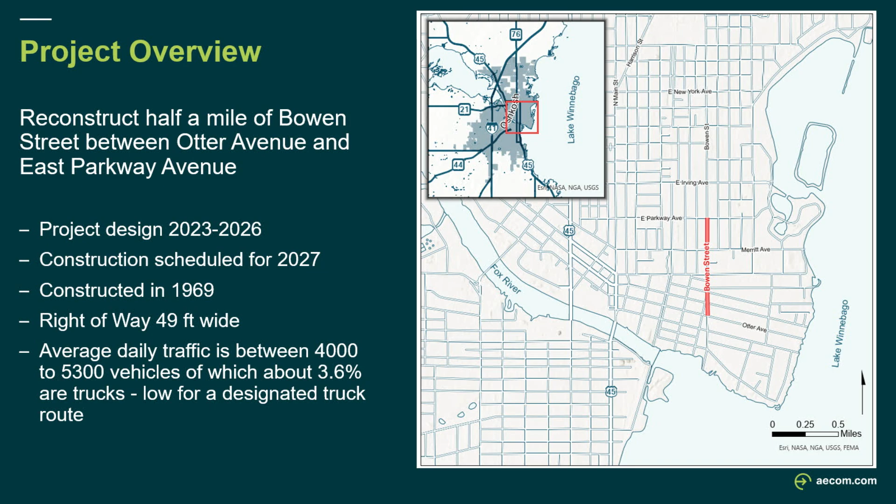Now, we did a lot of fact-finding. We met with the committee and presented in January, and between then and now we went out and did some studies. A speed study found that although it's posted at 25, the actual average speed is 31.7. We also set up some cameras to get parking information, mainly from Washington up through Merritt. The numbers vary—it's low from Washington to Merritt, 12% to 17% weekend to weekday, and from Parkway to Merritt it's a bit higher, 39% on weekends and 32% weekdays.

This corridor is included in the 2019 bike-ped plan, as noted in the city studies. From public feedback meetings, there's a clear show of support that they would prefer to maintain the parking versus adding bike facilities. Although, your state-city funding agreement includes the addition of bike facilities as recommended by your 2019 plan.

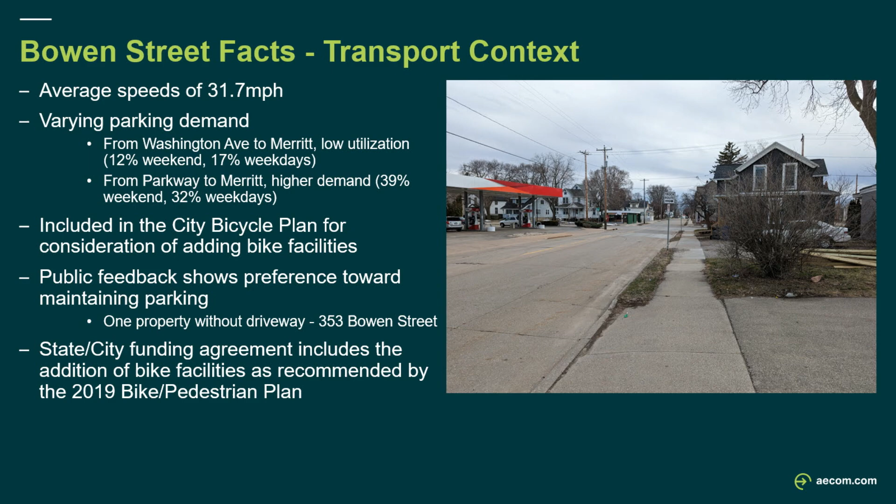So we did a series of public feedback or public involvement items. We did some mailings within the corridor. The project website's been up and running, and we post updates there. We did direct mailings to businesses and other institutions. We met with the neighborhood association, I believe in April, with 20 attendees—a pretty good turnout—and got a lot of feedback from those people.

We also reached out to the businesses within the corridor to get their feedback, and I believe we received one response from a business. Some of the key findings: parking is strongly preferred over any type of dedicated bike facilities, which came out of that meeting. Travel speeds were also a main concern.

So that brings us to our typical section, or what we want the roadway to look like. We looked at six alternatives. All six were included in the packet that you received from Jim. Three of them are viable and three are not, but we went through the whole gamut of options to see what could be done and what could not.

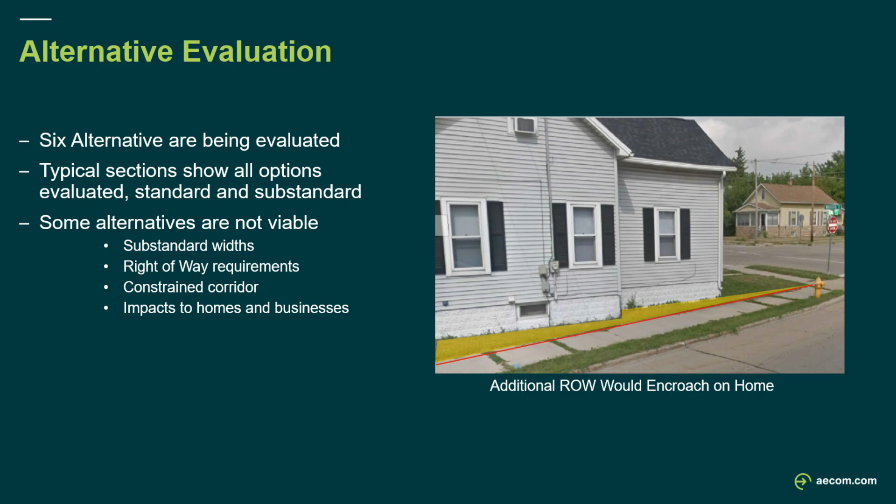The ones that are not viable have a lot of substandard conditions or elements that we pretty much cannot incorporate within the typical section. A lot of them have right-of-way constraints—they're a little wider than the 49 feet we have to work with. It's a constrained corridor because of that, and the tightness of some buildings located directly on the right-of-way line. Some of the options would also have varying or pretty high impacts to homes and businesses within the corridor.

So to briefly run through the alternatives that you received and viewed—along with that, there was a memo stating all the WisDOT standards and other standards that we looked at to incorporate those elements into these typical sections.

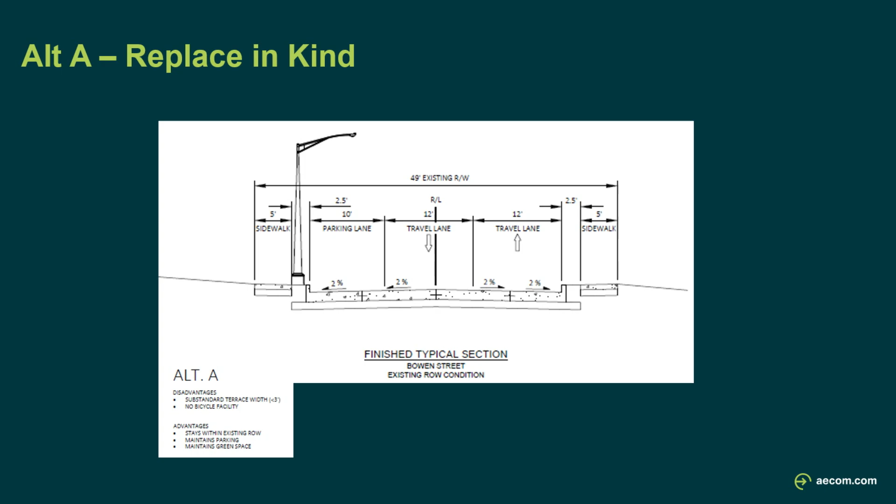Alternative A is just replacing it in kind—pretty much what's out there today. The only thing that would be substandard with this alternative is the terrace width, the grass terrace between the sidewalk and the curb—we're shy about half a foot to make it compliant with WisDOT standards. So that's something we'd have to take a look at, but alternative A is just putting it back to the way it is today.

B is just a very slight upgrade to A. It increases the terrace width from 2.5 feet to 3 feet, and that extra width is taken out of the parking lane. The existing parking lane is 10 feet, and the proposed would be 8 feet, with the extra width used to enhance the terrace width. So with alternative B, parking would be maintained and no bike facilities would be added.

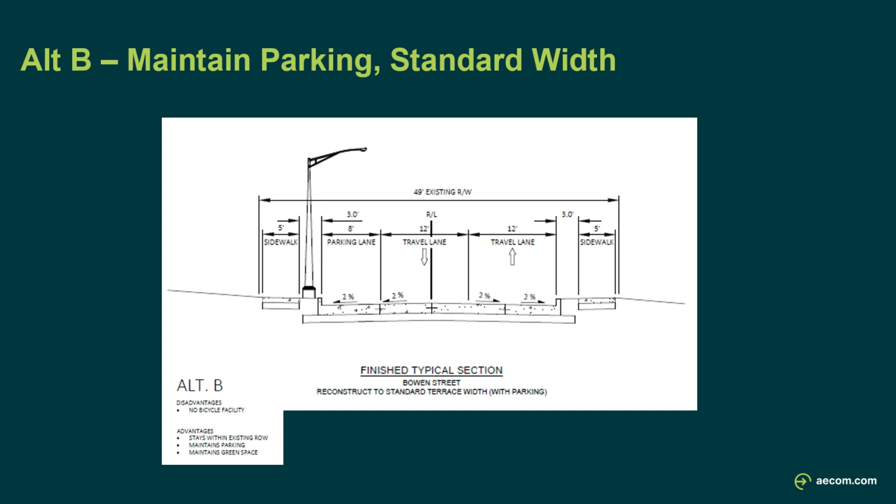Alternative C is adding bike lanes, which would eliminate the parking. You would add a bike lane on each side of the roadway, a 6-foot lane, maintain the two traffic lanes, one lane in each direction, and then provide the standard terrace width and sidewalk. So those are the three alternatives that would be viable or feasible within that 49-foot existing right-of-way, without taking any additional land from property owners or businesses or having major impacts to either of those parties.

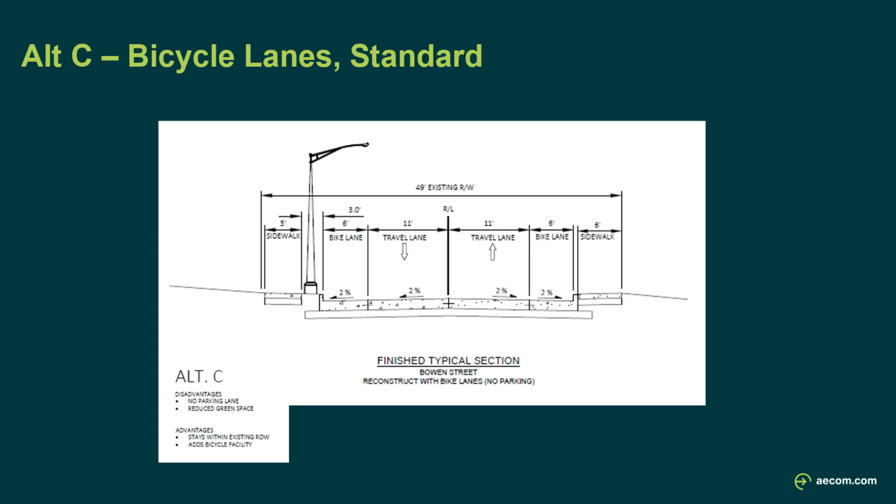Then we look at the last three alternatives, which are not really viable. Alternative D fits within the right-of-way, the 49 feet. This is where we try to accommodate all users. We have the parking lane, a shared bike and traffic lane, and the pedestrian traffic on the sidewalk. This one contains a lot of substandard widths for the sidewalk. The 4-foot is not compliant with WisDOT standards, and then we're minimum on the parking lane, and also a little bit under minimum for the travel lane and the shared travel lane and bike lane. We're a foot shy of the desirable minimum for that width.

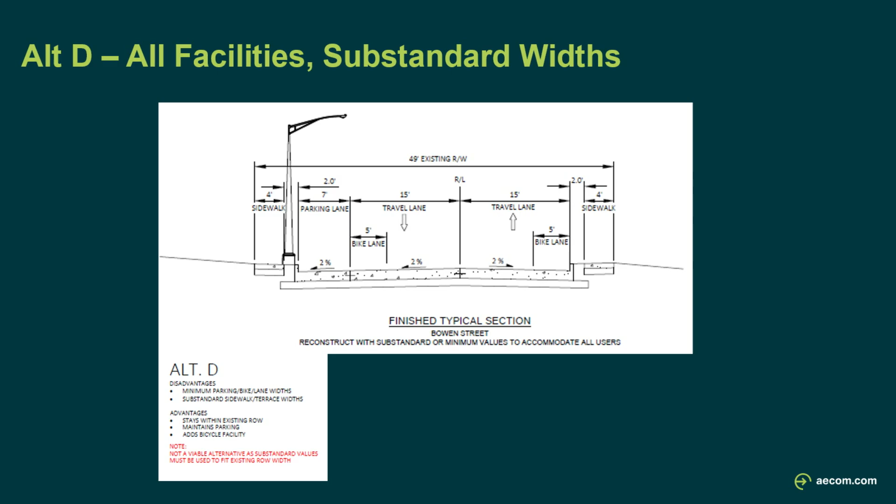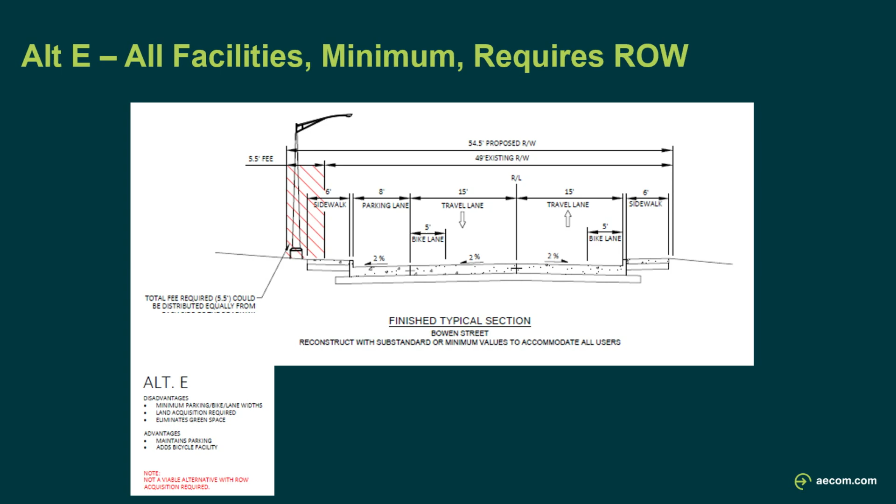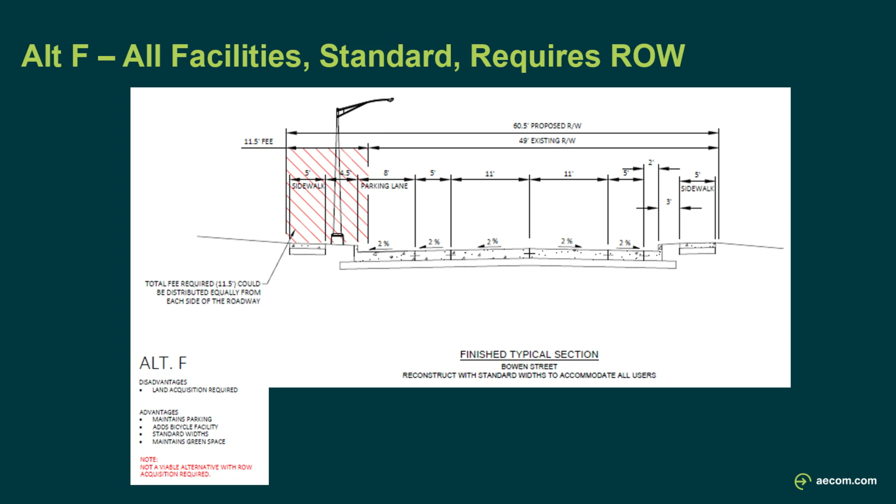And those were the alternatives we are currently looking at, and looking for a recommendation to move forward in our design.

Any questions? Do you want to take public comment and then bring it back to the board? Yes.

Time for public comments. Anyone wishing to speak to this agenda item, please go to the podium and state your name and address.

My name is Josh Belleville. I live at 721 Washington Avenue.

This construction project is right in my neighborhood. I just want to thank everybody for what you do. I got to listen to, I think it was the April meeting, and I think you guys have a lot of great ideas, and I do appreciate the things you say and do, because the way we move really makes a difference in our city. So I think you guys probably don't get enough credit for this committee, so thank you for that.

In regards to this project, I love it. I'm really excited about this. I know my wife went to the meeting you guys had, and she did say that everybody wanted more parking. I bike to work, I bike a lot, I love biking, but I do understand that my neighborhood is heavily parking related, and there's a lot of cars there. I think we have good bike lanes from Washington to the park, and there are other great streets to just kind of make your way on your bike, so I'm not really going to push for biking stuff on that. I think a lot of people need parking in our neighborhood, and I do see a lot of cars. I live on the corner.